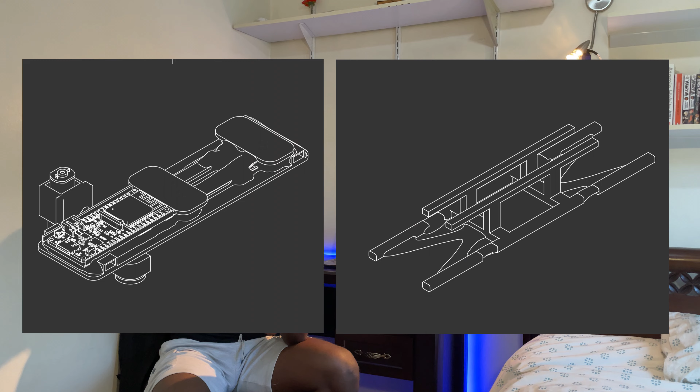But I eventually settled on these two components, the droke and the flatch. Essentially, the droke is the component that is attached to the drone and holds the flatch in place. When it's time to deliver a package, a latch is released and the flatch falls off, delivering the package.

Now, when it came to designing these, the process was surprisingly fun, because I got to use the generative AI feature on Fusion 360, which meant that I could optimize each of the parts to minimize the material and get a super cool organic looking touch.

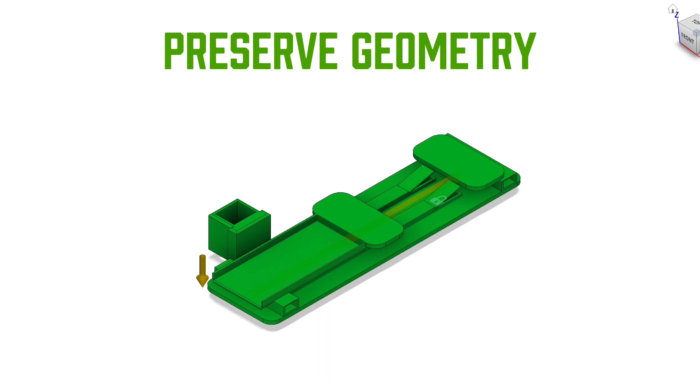Now, let me explain generative AI to you. Essentially, what you get is three geometries: preserved geometries, obstacle geometries, and a starting shape. The preserved geometries are what you want to keep. You're basically telling the AI, do not touch these.

The obstacle geometries are what you tell the AI, stay away from these, and I don't want you to generate anything in these parts of the design. And the starting shape is basically like, you know, what am I expecting? Or if you're minimizing the material, start with this shape and cut away from it.

The other thing you need to add is a bunch of constraints, which you add using forces. These are the forces you're expecting the object to endure while it's in use. So design this keeping in mind that if it can't tolerate these forces, it's trash. And with all of that in mind, you give it to the AI and you let it cook.

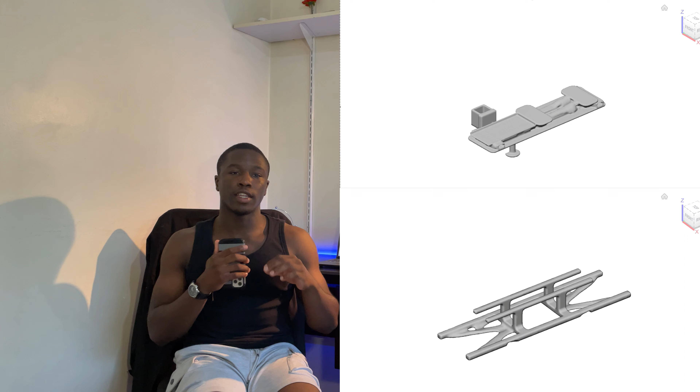And once you're done, you get a pretty organic looking finish that could never have been designed by a human. And you minimize the material costs, which is an added bonus, because the less weight you have, the better the drone flies. Now comes the part we all love, the 3D printing.

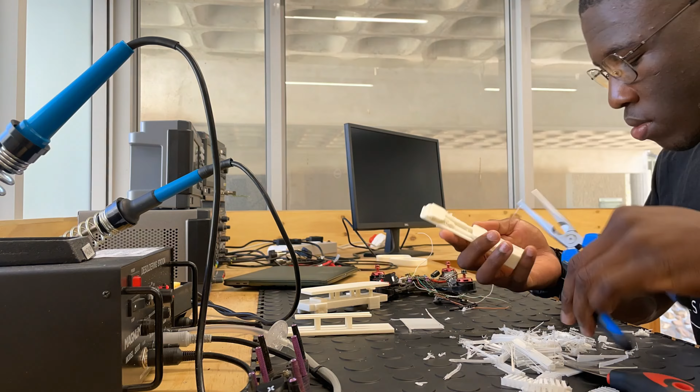When it got to this part, initially I printed this thing just using a normal Creality printer, using PLA plastic. And when I saw that removing the supports took me a literal 30 minutes just for me to break it while trying to land this thing on the droke, I knew it was done.

And that's where I resorted to get a cool resin print, courtesy of Justway, which delivered a spectacular job. And if you know anything about resin printing, is that there's zero supports and it came out super clean and it got a cool futuristic look.

So the next part of all of this is the electronics. How exactly do we get the drone to know when to drop the package? The easiest part would just be to add a button to the controller and press it when it's time for the drone to drop the package, right? So let's actually just try that.

We can accomplish this by using a powerful microcontroller like an ESP32 to intercept the signal that the receiver is sending to the flight controller. Essentially, everything that your receiver is sending to your flight controller is the state of your transmitter, which is your controller. Every button that's been pressed, every switch that's been flipped, and every knob that's been turned.

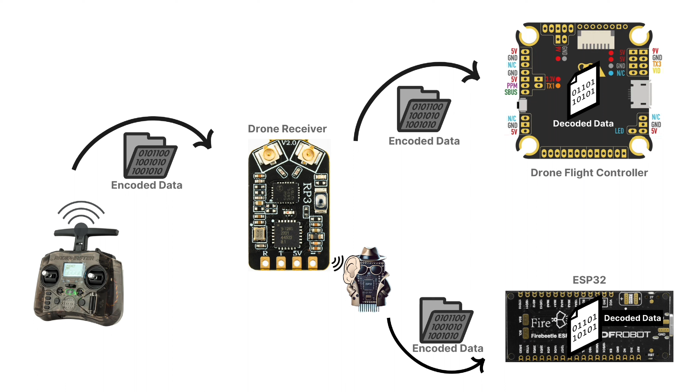And since we're intercepting the signal with the ESP32, we can decode the signal, and the ESP32 will now have the knowledge of your entire controller. So we can just tell the ESP32 to release the latch when a certain button has been pressed.

And since when you're flying your drone, you're not pressing every single button at the same time, we can just assign it to one of the unused buttons. And voila, just like that, we've got the drone to drop the package whenever we want it to drop the package.

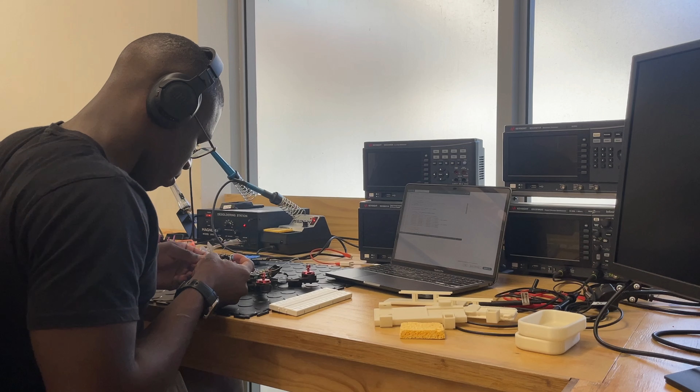Now that the design and the electronics are done, it's just a case of putting everything together. And although the drone didn't have that much space and it was kind of like fitting 10 people in a car, when everything did fit, we were ready to take this thing for a flight.

Okay, maiden test flight.

It works. Let's go! And nothing is broken. It works!

Once maximal confidence was achieved, it was time to call up the gang and launch the drone. Cue the montage. This is the gang. We're at the sites. There's the other gang. They're on the stairs, ready to receive the package. Those three fine gentlemen.

Wasila, how are you feeling? Feeling awesome, man. Should be a good one. Kiara, how are you feeling? Really cool. This will be really awesome.

Dan, how are you feeling? You got your... I think what you're feeling is the best out of everyone, bro. But I'm feeling good.

Now get me in the camera. Yeah, hey man, how you feeling? I'm feeling excited. I've been working on this thing for so long. I didn't think it would work, but I guess it worked last night in my room, so it should work today.